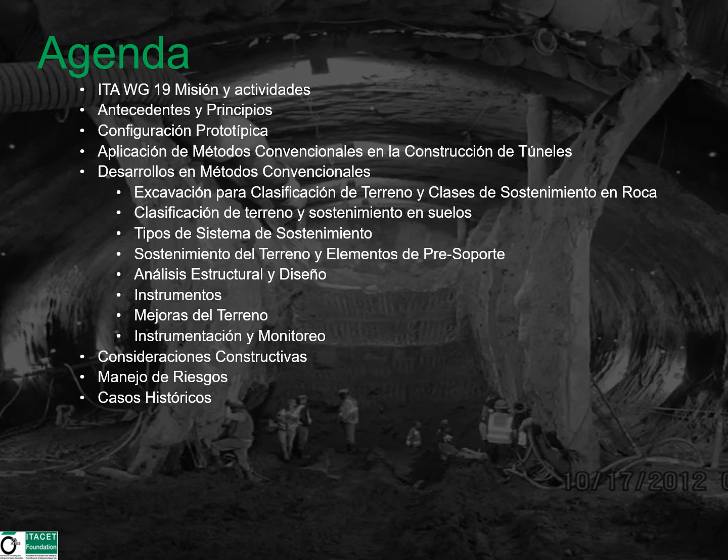I will present the background and principles of conventional tunneling, prototypical configuration of tunnel cross-sections, application of conventional tunneling, and recent developments including ground classification and support systems, ground improvement, as well as instrumentation and monitoring. We will also consider construction aspects and discuss risk management. Then I will present a case history using a construction station in San Francisco using conventional tunneling.

Conventional tunneling is the terminology adopted by the ITA. It is referred to differently in different parts of the world, such as the New Austrian Tunneling Method, or NATM, in Europe and part of Asia, Sequential Excavation Method, or SEM, in North America, or Sprayed Concrete Lining in the UK.

Working Group 19 consists of about 30 people, and I lead that group. Our mission is to promote the advancement of conventional tunneling and the latest developments in its application. We have produced several reports, published and available through the ITA website, and we are presently working on a report entitled Guidelines for the Design and Construction of Conventional Tunneling in Urban Setting. This will be issued next year in 2021.

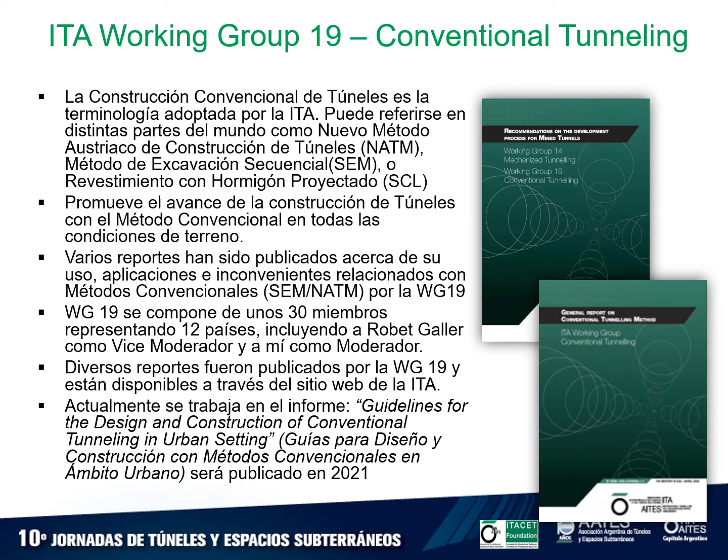Conventional tunneling is a concept based on understanding the interaction between the ground and the structure itself, by creation of the tunnel opening and the ground support while attempting to mobilize the optimum ground self-supporting capabilities. It involves ground engineering science, geotechnical engineering, as well as practical experience.

It was developed in its present form in Austria in the 1960s for rock tunnels, then adapted for soft ground since 1968 in Germany. Presently, it is being used widely throughout the world.

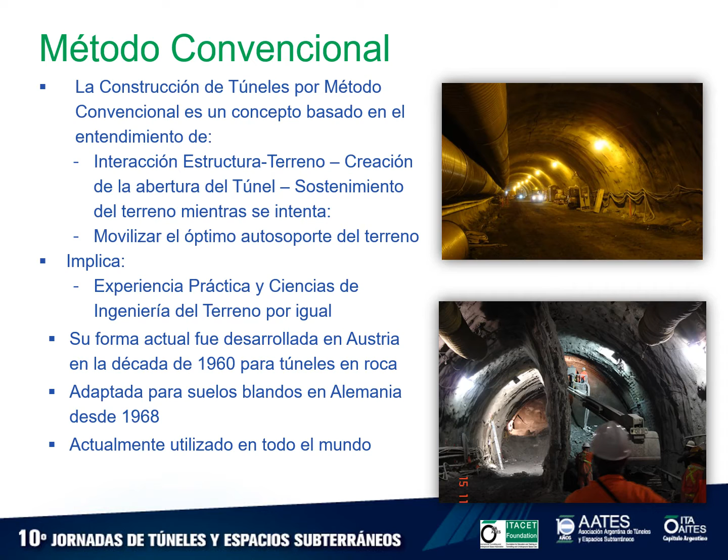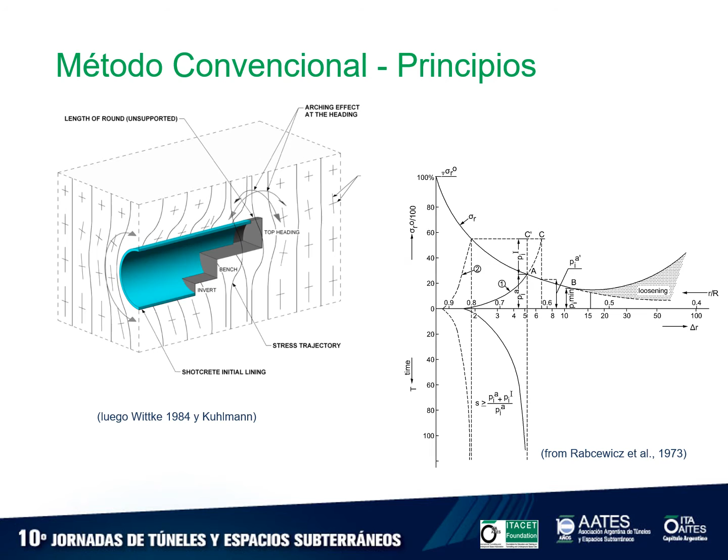If we limit the deformation significantly, moving the curve to the left, the stresses will be too high in the liner. If we move it all the way to the right, excessive deformation leads to a potential failure. Therefore, it's very important to recognize and mobilize the self-supporting capabilities of the ground itself.

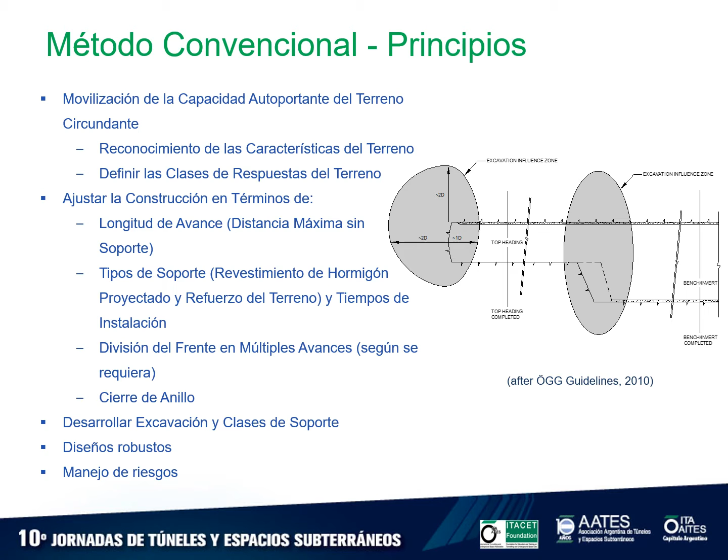This is done by recognizing the ground characteristics and behavior in response to excavation and defining the ground response classes to meet those characteristics, such as adjustment in the round length, the maximum unsupported length, the type of support measures needed, such as shotcrete lining and ground reinforcement, or subdividing the heading into multiple drifts to reduce the cross-sectional area, as well as ring closure to create a curvilinear structure. In all of this, we address risk management in the design to handle the conditions of the ground itself.

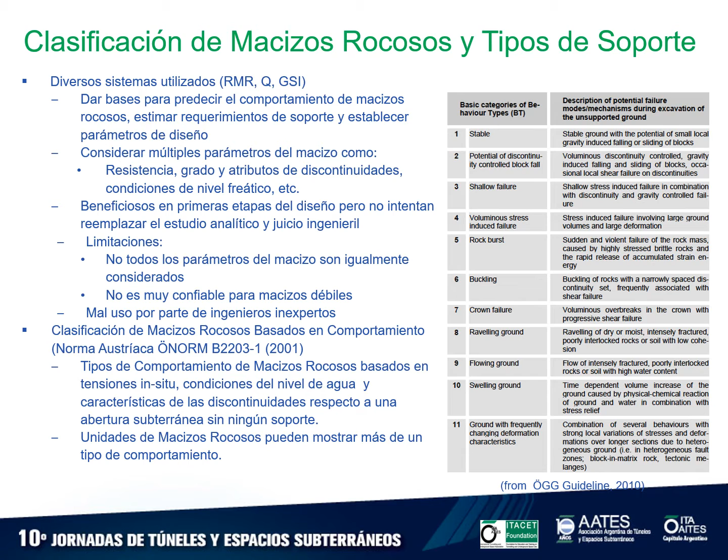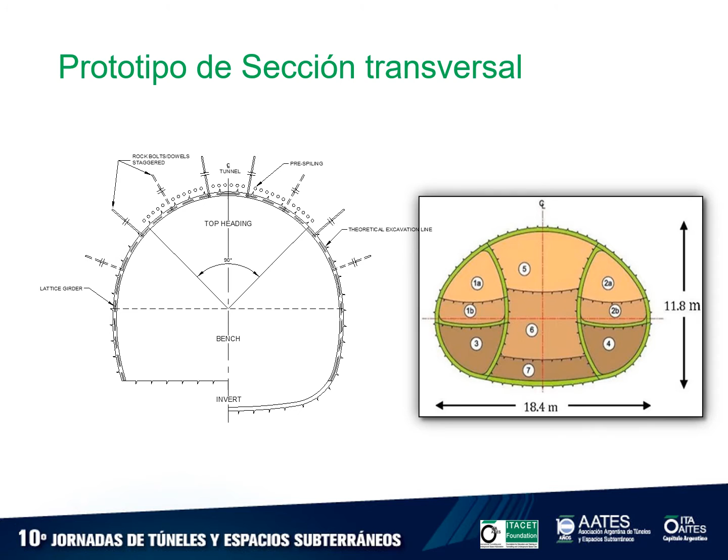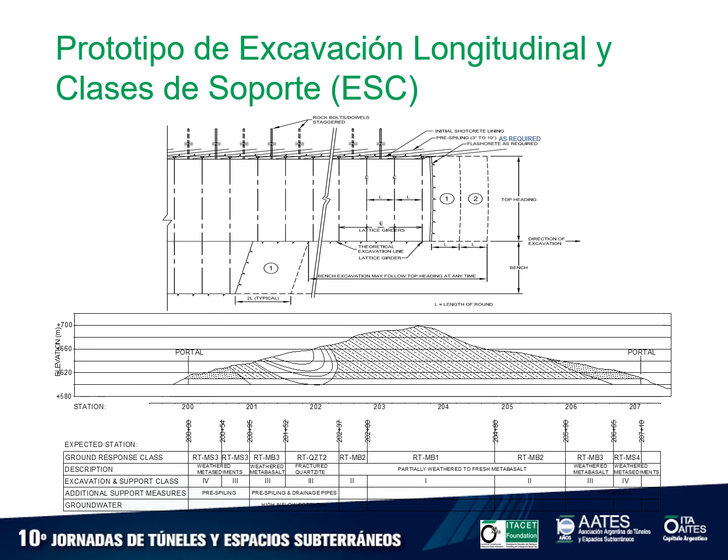In this example, we're showing the design approach addressing rock mass classification and support category. As you can see from this graph, this is a rock tunnel that passes through multiple faults and different formations throughout its length. So we provide the geological model, the geotechnical model, which is the ground response classes, as well as the tunnel support model, which is the excavation and support classes. All of these are shown graphically in the presentation here.

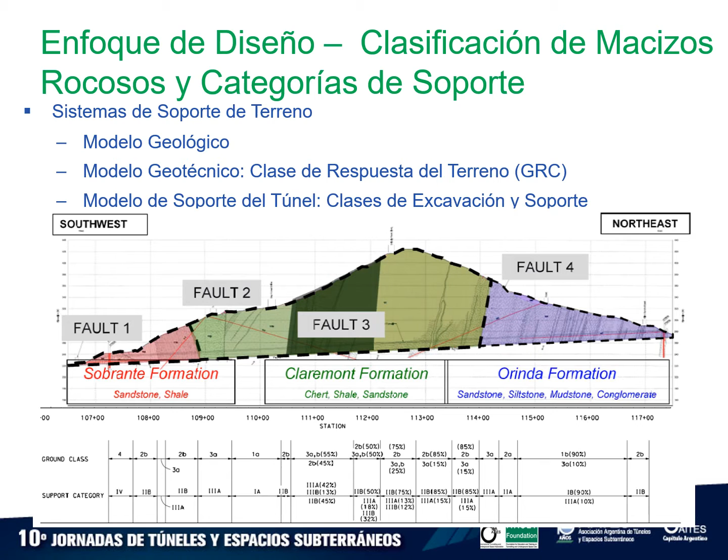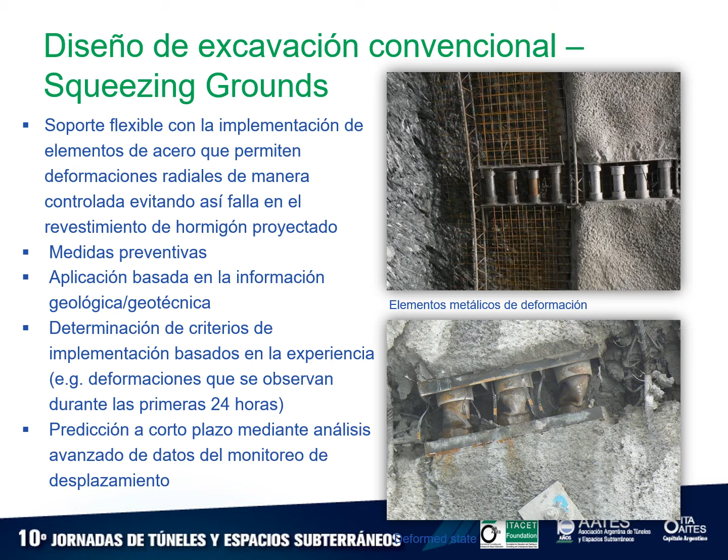One of the challenges of conventional tunneling in hard rock is squeezing ground. In order to accommodate the deformation of the ground without impacting the structural system, flexible support can be provided, such as using steel yielding elements to accommodate deformation and allow radial displacement in a controlled manner. As you can see in the upper picture, these steel yielding elements are hydraulic jacks in a sense, placed within the liner, and in the lower picture you see them in a deformed state. This allows the deformation of the rock, and it is a preventive measure that prevents the failure of the shotcrete.

Similar to the rock application, conventional tunneling in soft ground also relies on the ground behavior and on its self-supporting capabilities during creation of the underground opening. The curvilinear shape promotes smooth stress redistribution and minimizes stress concentration on the liner. The shotcrete provides interlocking to the ground in order to improve the ground's self-supporting capabilities.

Round length, subdivision, and timing of the support installation are important factors. In addition, in soft ground we sometimes have to use ground improvement and pre-support measures to enhance the ground's self-supporting capabilities. In all of these aspects, monitoring of the deformation of the tunnel is very critical to assure its stability.

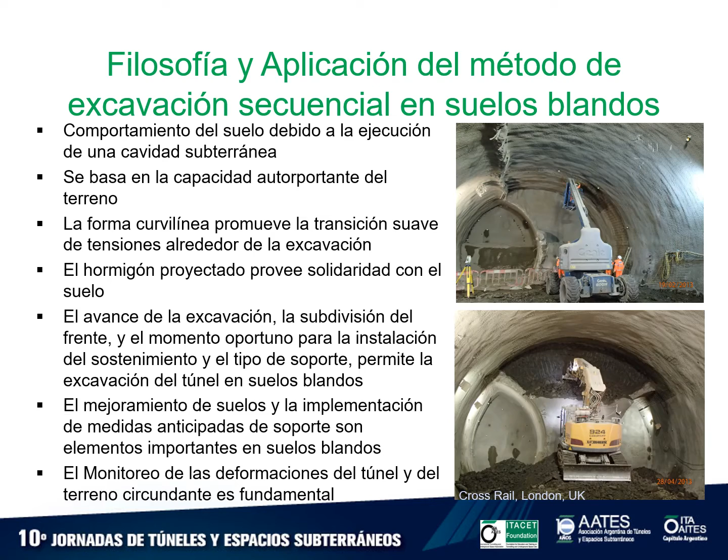To emphasize, the principles of conventional tunneling in soft ground are: sequential excavation, curvilinear shapes with no corners, initial support using shotcrete combined with either steel fiber or welded wire fabric, lattice girder, and ground reinforcement if needed. Pre-support such as spiles, pipe umbrella, jet grouting, as well as face support if needed. It's very important to close the ring promptly in order to create a complete curvilinear shape.

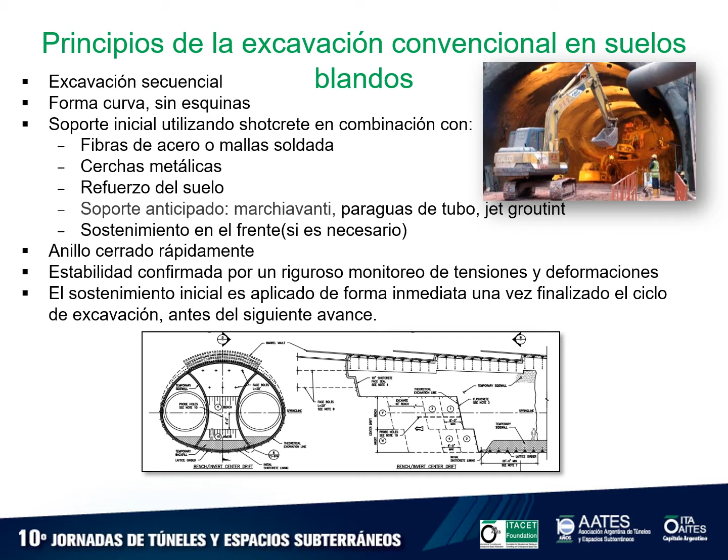It's very important that the initial supports are applied immediately upon excavation and before proceeding to the next round. In order to accommodate that, several methods were developed, including ground classification and excavation support classes. The excavation support classes address the ground behavior for excavation by adjusting the round length, the initial support measure, and the sequence of excavation.

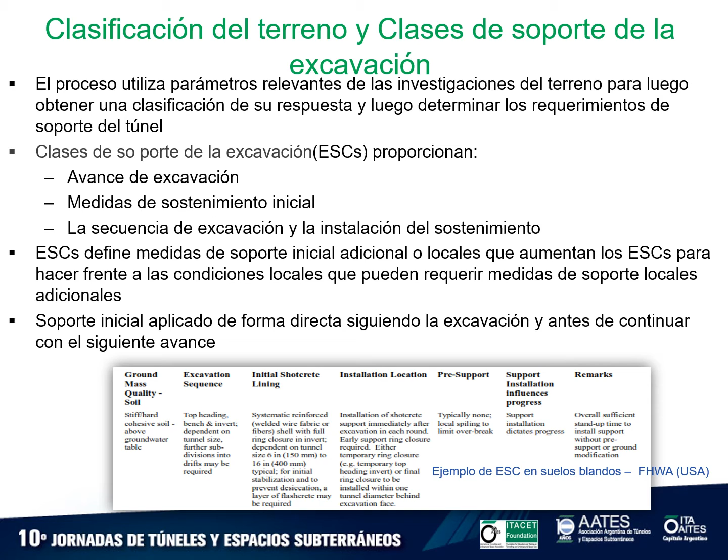As you can see from the graph below, this is an example of the excavation support classes developed by the Federal Highway Administration in the United States. It's intended as guidelines rather than direct application; it has to be addressed on a project-by-project and condition-by-condition basis. The excavation support classes also define means of any additional support or local measure needed to augment the initial support as identified.

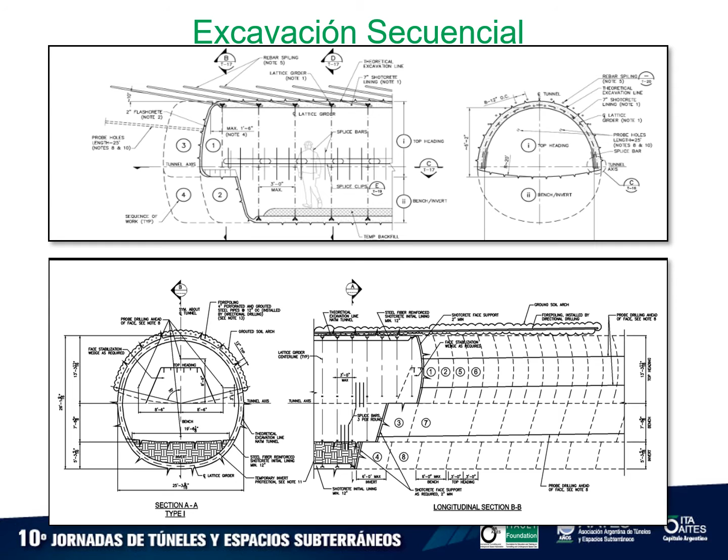In the lower picture, the cross-section is much bigger. As a result, a top heading, a bench, and an invert were done in sequence. The top heading round length is much smaller than the bench and invert, and face support was provided with shotcrete for the top heading, bench, and invert. In addition, there is a pre-support measure such as jet grouting or pipe arch canopy.

The main support elements of conventional tunneling are the cross-section itself and the sequence of excavation, and the initial support, consisting of rock bolts in rock and shotcrete or lattice girder in soft ground, as well as steel fiber or welded wire mesh in the shotcrete. In addition, ground reinforcement and pre-support. Often, especially in poor ground, we use pre-support elements such as pipe umbrella, spiles, or horizontal jet grouting, and sometimes as needed we use face support to control the face.

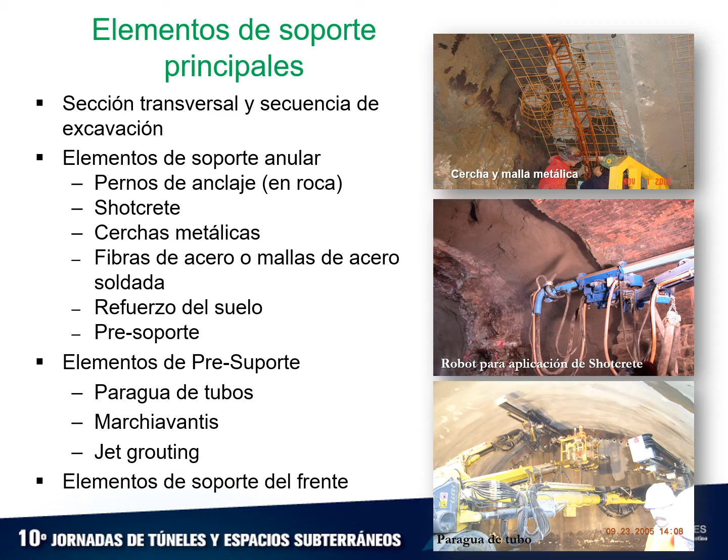For structural analysis and design, it's very important to use the ground and structure interaction model, relying on the stress redistribution and deformation of the surrounding ground. Therefore, either finite element models or finite difference models will be used. Most of the time, 2D analysis is sufficient; however, at certain locations such as junctions, intersections, caverns, or difficult ground conditions, 3D modeling becomes important. In all cases, it's important to avoid embedded frame modeling because it does not take into consideration the ground behavior or the ground-structure interaction.

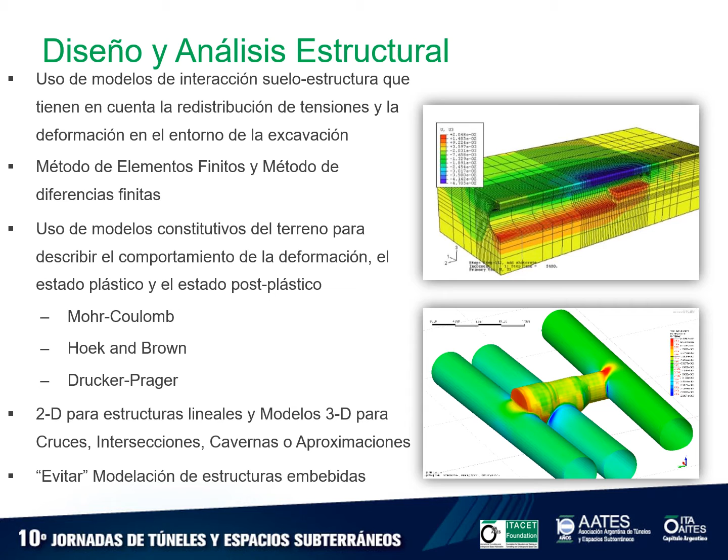The excavation method depends on the quality of the ground we are encountering. For example, in hard rock, we use drill and blast. However, in medium to highly jointed rock, we can use a roadheader. In soil-like rock, we can use backhoes, and similarly for soft ground, we can use backhoes or other excavators to excavate the ground.

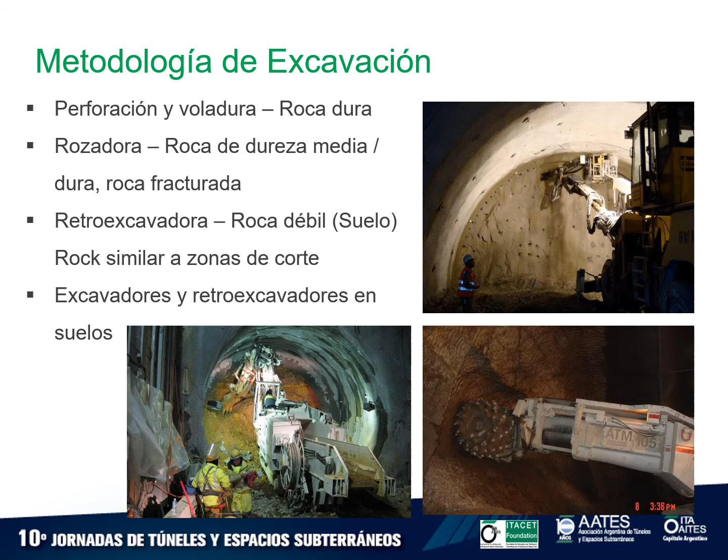In addition to the excavation and support classes defined earlier, we also developed what is called conventional tunneling toolboxes.

I will discuss some of those right now. For example, we can use pre-support elements such as spiles, grouted pipe umbrella, vacuum dewatering, or horizontal jet grouting, all in order to improve the stand-up time of the ground.

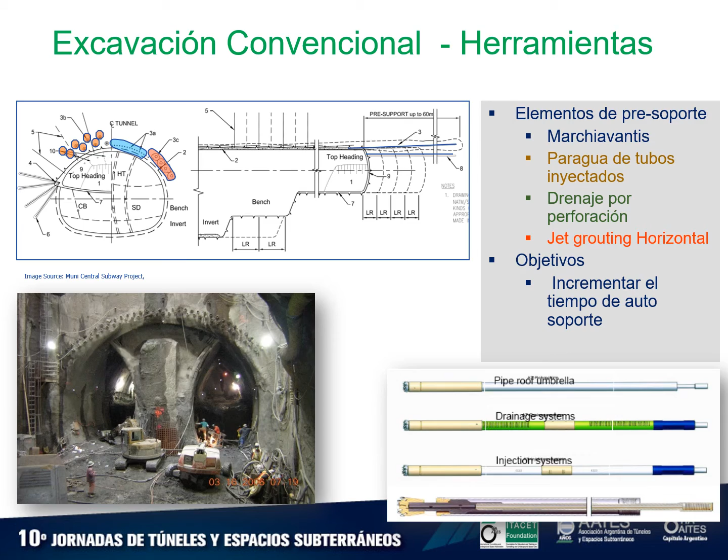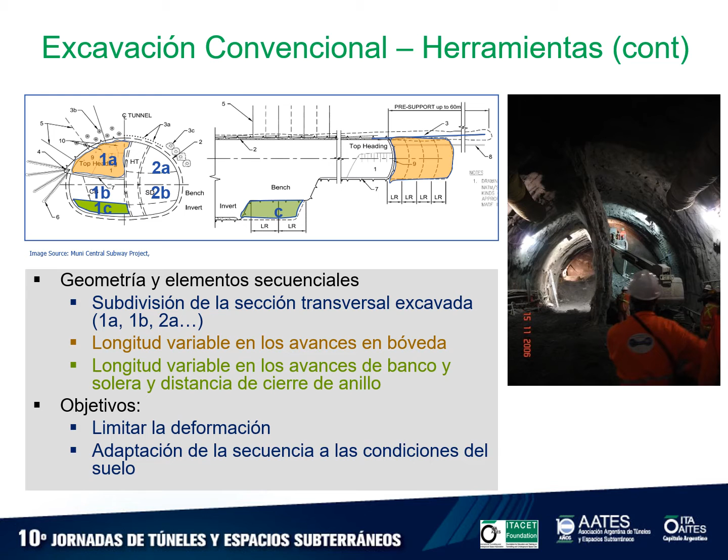Other measures include the geometry and sequencing of the excavation by subdividing the cross-section into components small enough. The purpose is to limit deformation and to tailor the sequencing of excavation to the ground condition and its behavior during excavation.

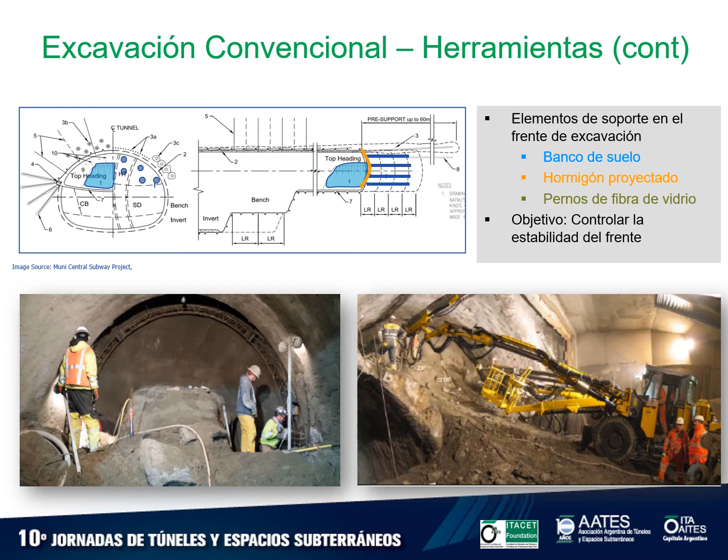Other measures include face support elements, such as using an earth wedge to stabilize the face, shotcreting the face, or installing fiberglass bolts in the face. The lower right picture shows installation of the fiberglass face bolt, while the lower left shows the earth wedge kept in place to minimize face deformation.

Other tools in the toolbox include annular support elements, by increasing the length and/or spacing of the ground support, increasing the thickness of the arch shotcrete, or installing temporary shotcrete in the invert if needed. The goal of all this is to create a ground arch to mobilize the inherent strength of the ground.

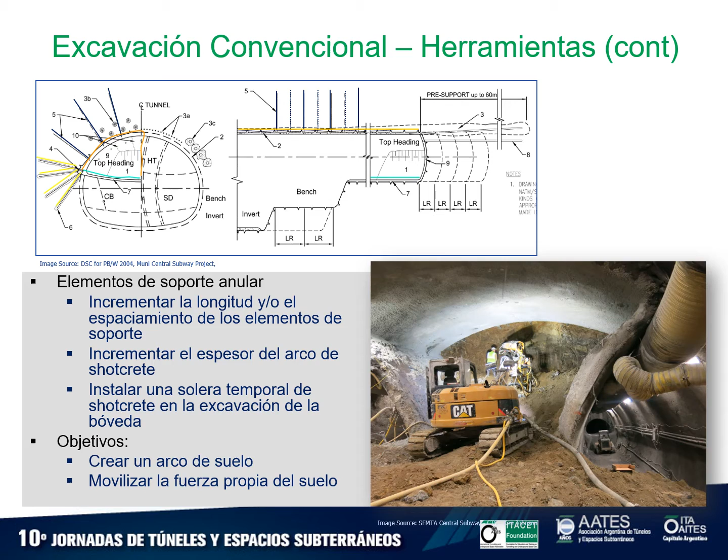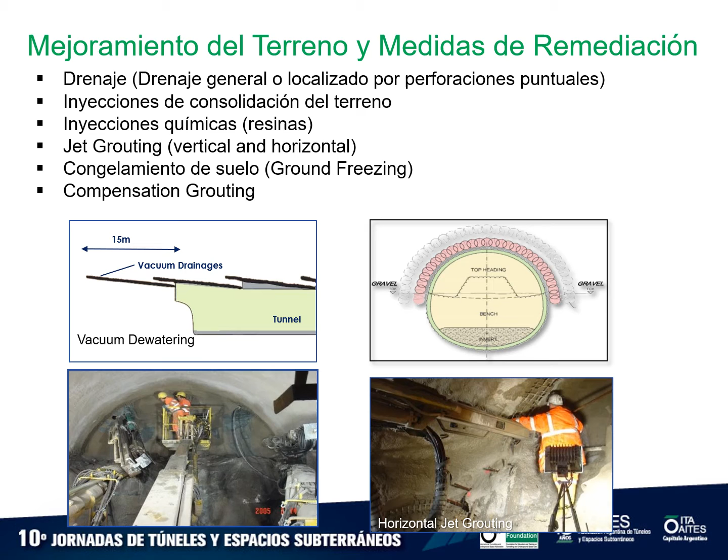To increase the ground's self-supporting capability, we sometimes need ground improvement and remedial measures. These include dewatering, either general area dewatering or vacuum dewatering from within the excavation, permeation grouting, chemical grouting, or jet grouting, vertical or horizontal. We can also use freezing, which we've used on some projects, and to accommodate potential settlement from excavation, compensation grouting can be used to restore the surface.

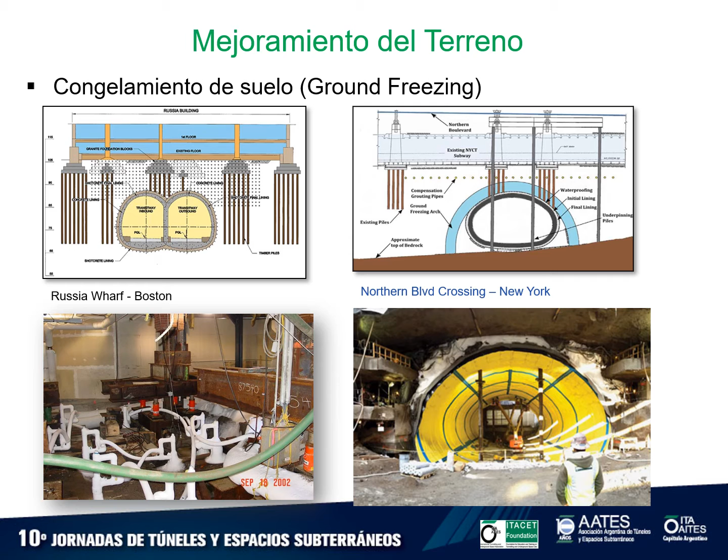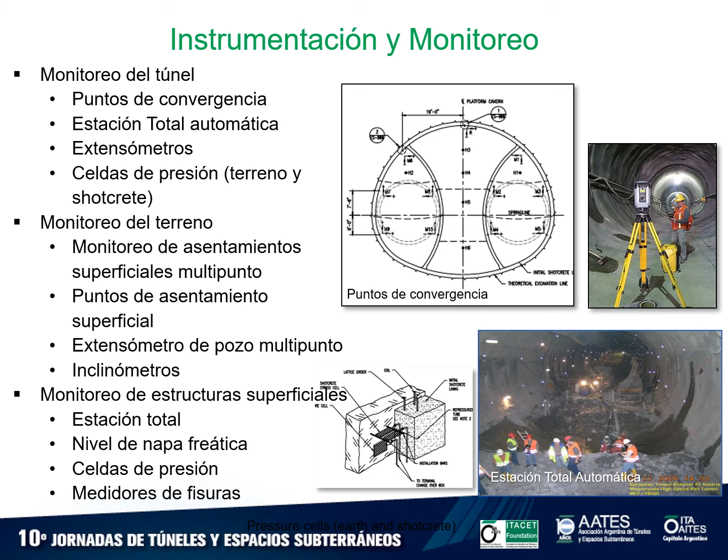In areas where adjoining structures are sensitive to deformation or displacement, compensation grouting is often used. That involves installation of tube a manchette under the building foundations, and as potential settlement starts to happen, grout is injected to restore the building back to its original foundation level.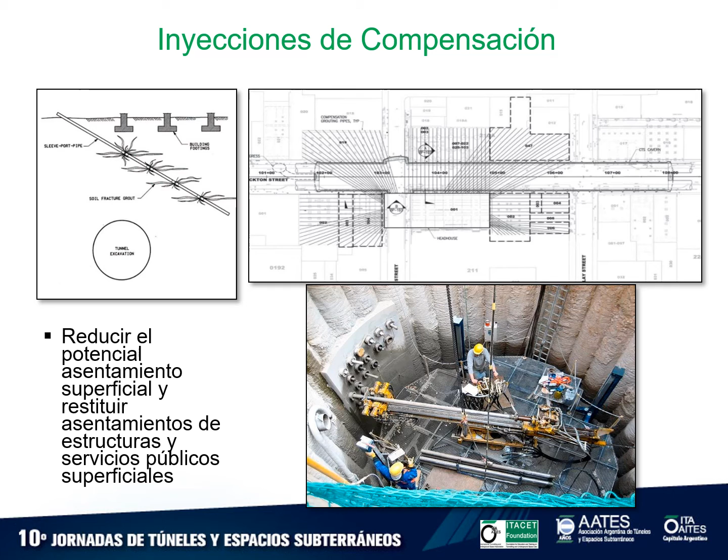For successful application of conventional tunneling, risk management by design is essential. Early in the design process, we identify potential risks, their probability of occurrence, and their consequences, and document them in the risk registry. Preventive and corrective measures to reduce or eliminate risk are developed during design.

One of the tools of risk management is the application of the geotechnical baseline report, in which the ground behavior to the excavation is defined and documented.

Another element for successful application of conventional tunneling is to have progressive contractual provisions. For example, contractors should be pre-qualified, experienced personnel should be available and implemented in every shift, and flexible design documents with field adjustment should be available.

One tool we've identified and implemented is the excavation and support meeting in the field, in which representatives of the contractor, the designer, and the owner meet every day after work hours to assess the ground behavior and performance of the excavation and determine the course of action for the following day, including whether any corrective action needs to be made.

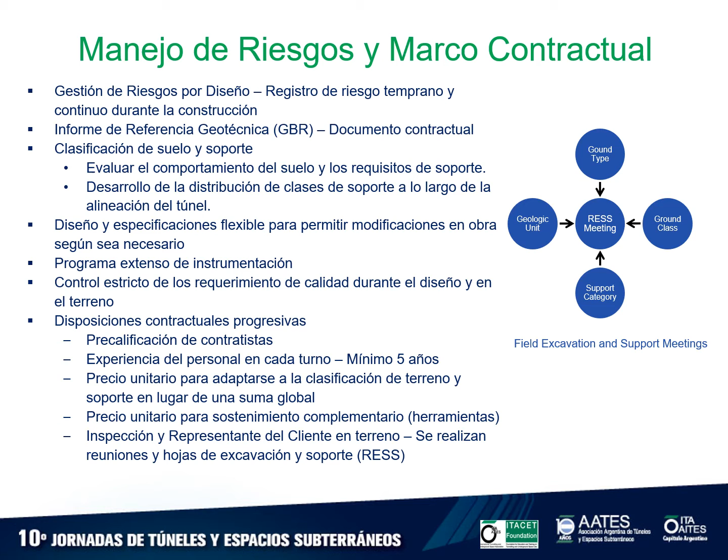With flexibility and a progressive contractual framework, we'll be able to successfully apply conventional tunneling.

I would like to present a case history: the construction of the Chinatown Station in San Francisco, United States. The owner is the San Francisco Municipal Transportation Agency. The Chinatown Station is a metro station.

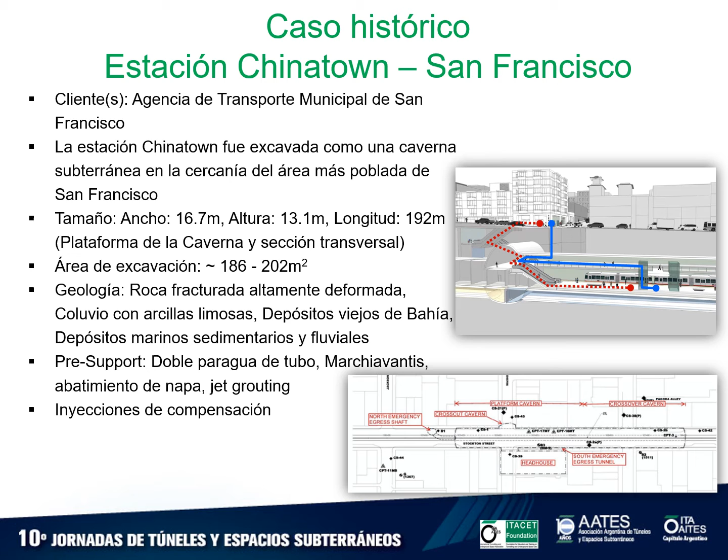It is excavated as a mined cavern in a very densely populated area. The cavern width is 16.7 meters, with a height of 13.1 meters and a length of 192 meters. As a result, the excavation cross-section is very large. It is located in a dense area with very difficult ground conditions. Pre-support measures including double pipe arch canopy, spiles, and jet grouting were used, as well as compensation grouting.

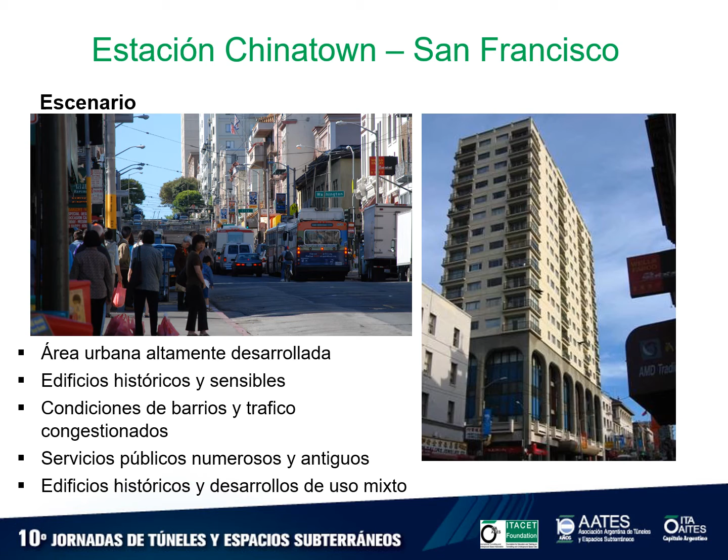Chinatown Station in San Francisco is located in one of the densest concentrations of people in San Francisco. It is a highly developed urban area with historical and sensitive buildings surrounding it, a congested neighborhood with heavy surface traffic, as well as numerous old utilities underground adjoining the station location.

The soil is a Colma formation consisting of dense sand and silty sand interbedded with stiff clay and sandy silty clay, while the rock formation is the Franciscan complex bedrock, which is variable in composition, degree of fracturing, strength, hardness, and weathering. The rock mass is extensively sheared, a chaotic, heterogeneous mixture of small to large masses of different rock type consisting of sandstone, shale, siltstone, and various metamorphic rock.

The RQD of this rock was consistently 0.

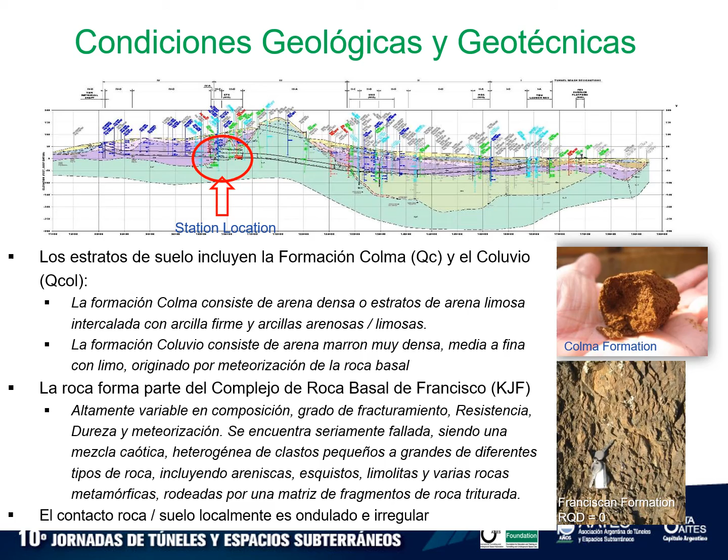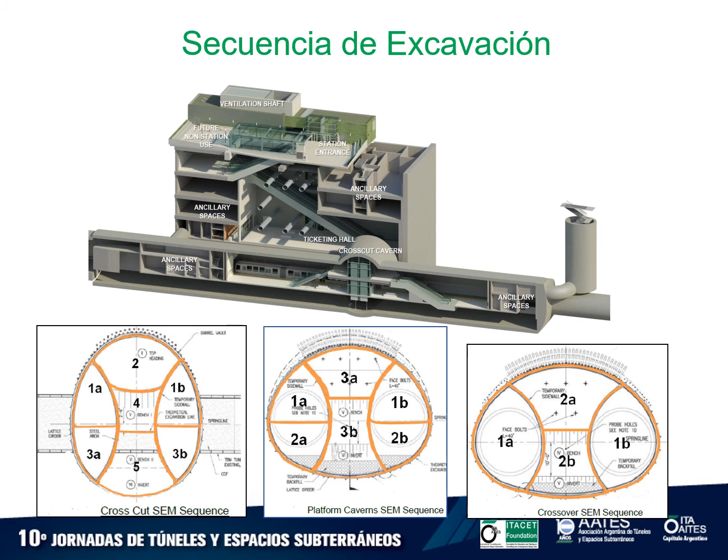To construct the station, we excavated the head house shaft off the street, and then from there we excavated a cross-cut cavern across the street, and that was used as a mining cavern to excavate to the north and to the south to build the station platform cavern as well as the crossover cavern, as shown in this figure.

Some of the challenges we encountered are the large excavation size in difficult ground conditions. Therefore, we opted to have a prescriptive sequential excavation design. The excavation was done in small drifts. Pre-support measures such as pipe arch canopy were done ahead of the face, and closely spaced lattice girders and shotcrete were implemented. We controlled the groundwater by dewatering of the area, and we provided a toolbox for support as needed if there were any changes.

Other challenges included the high groundwater table. Therefore, we opted to do pre-excavation dewatering using a deep well system, as well as provided a vacuum well dewatering from within the excavation.

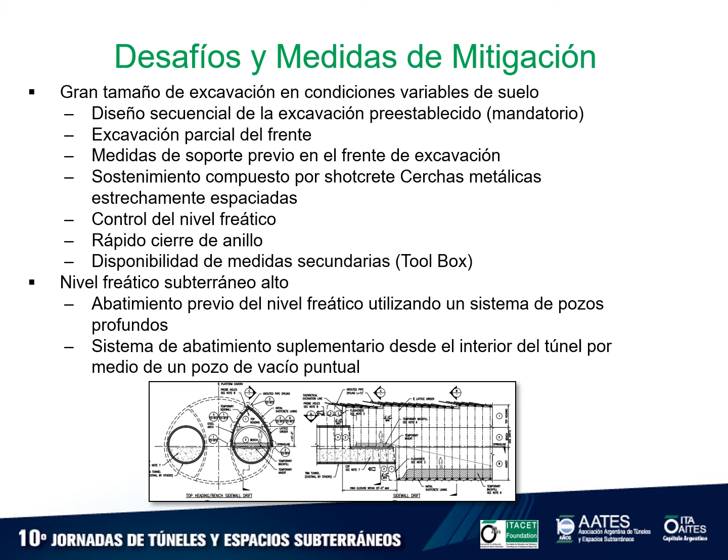Another challenge we encountered is the shallow cover and the potential damage to adjoining structures. As I mentioned earlier, there are a significant number of utilities in the street, as well as historical and sensitive buildings nearby. As a result, we lowered the station to increase the cover. However, we could not lower it significantly without impacting its operation.

We did pre- and post-construction condition surveys of the buildings, and applied systematic pre-support measures to minimize settlement using small drifts. We monitored the ground deformation during excavation, as well as conducted extensive instrumentation and monitoring of the buildings and utilities.

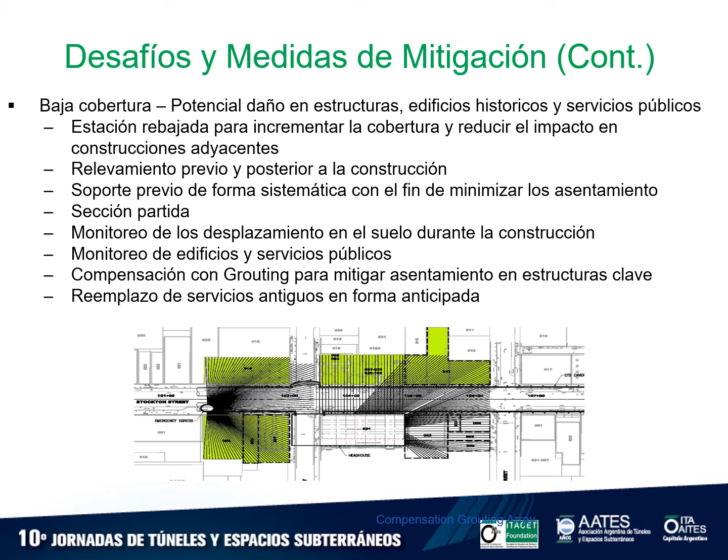To address potential settlement, we implemented a compensation grouting program to mitigate the impact on key structures. As a matter of fact, one of the buildings across the street, which was very sensitive to potential settlement, required compensation grouting to restore it. The maximum settlement that occurred throughout the entire excavation was limited to 12 millimeters.

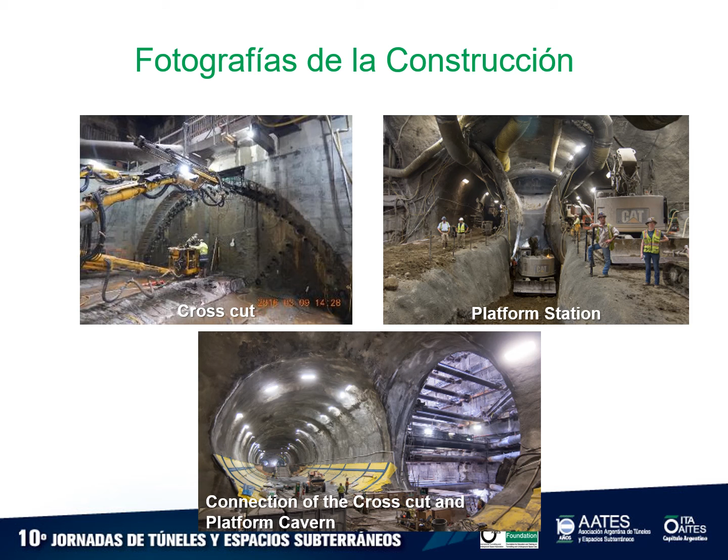These are some photographs of the construction. As you can see in the upper left, the application of the pre-support measure using pipe arch canopy for the cross cut. The picture on the right hand side is the platform station excavation, done with two side drifts and the center drift top, middle, and bottom. The bottom picture shows the connection between the crosscut and the platform cavern.

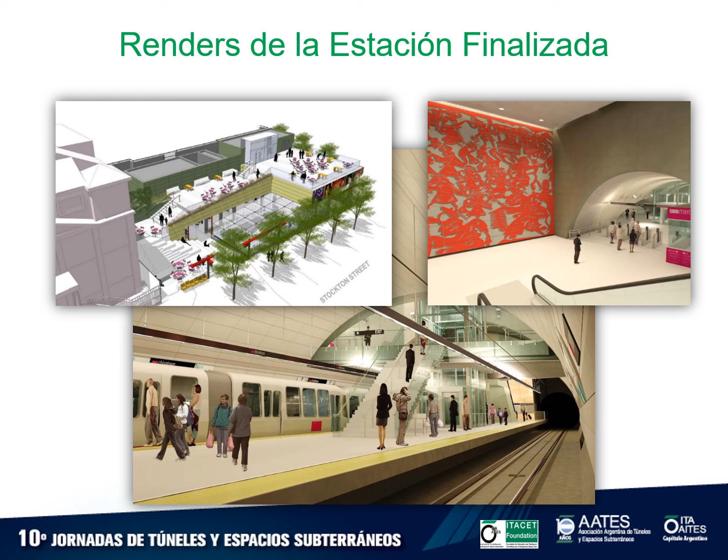When completed, what you will see on the upper left picture is the rendering of the entrance, then the mezzanine, which is the crosscut, as you can see on the right picture, and the bottom picture showing the station platform in its final configuration.

There are numerous advantages of conventional tunneling. It is flexible in geometry and can accommodate almost any size or shape of opening. Its curvilinear shape promotes smooth stress redistribution in the ground, minimizing the need for heavy structural systems. It is adaptable and can allow tunneling through a variety of ground. No special equipment is required, and the tunnel cross-section, if it is big, can be subdivided into multiple drifts to provide stability of the excavation and minimize the impact on the ground.

Shotcrete is a key support element due to its capability to provide interlocking with the ground, provide initial support, and continuous support to the ground. Implementation of ground improvement measures such as dewatering, grouting, ground freezing, or other measures enhances the applicability of conventional tunneling in various ground conditions and in more difficult and urban areas.

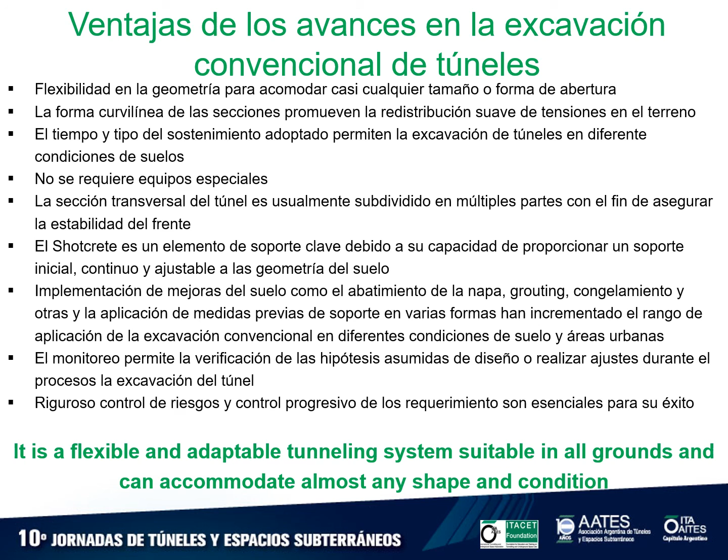It is essential to have monitoring to verify the design assumptions and for adjustment of the tunneling process during construction. It's important to have progressive contractual requirements and rigorous risk management for its success. It is a flexible and adaptable tunneling system suitable in all ground and can accommodate almost any shape and condition.